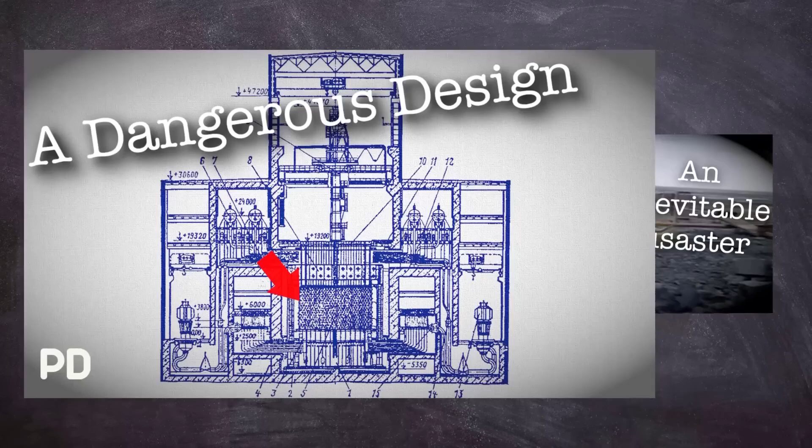Don't worry, I'll still be here when you get back. Ah, you're back. Welcome. Yep, I know it was a bit of an overdone trope, so let's get back to the main reason why you're here.

Our story starts back in 1970 in Ukraine, about 100 kilometres, 62 miles, from Kiev, when ground was broken for a new city that would become known as Pripyat, an atomgrad designed to house the workers for a new nuclear plant. It should be said that the original plans were to build the city and the plant just 25 kilometres or 16 miles from Kiev, but it was thought to be too close to a major city, which turned out to be a good decision.

The concept of an atomgrad is similar to, say, Tomsk, which were closed cities, although Pripyat was open later on in its short lifetime as a city. These municipalities were designed to be self-contained communities that had a sole purpose: keeping the power plant working and, by extension, the workers that were employed there happy. The community at Pripyat was developed to be the perfect home for a young family, with its amusement park and modern, at the time, architecture.

In the same year, the ground where the new plant would exist was prepared for construction. The Chernobyl Nuclear Power Plant began construction proper in 1972 after the central government decided on what type of reactors the site would house. Originally, the idea for a pressurised water reactor was thought to suit the new plant, but it was overruled by Anatoly Alexandrov, the chief scientist who was at the time supervisor of the RBMK reactor plant project. The reactor type was preferred due to the design being cheaper to produce, and as we found out with Leningrad, that cost was a pretty high priority, some might say even over safety.

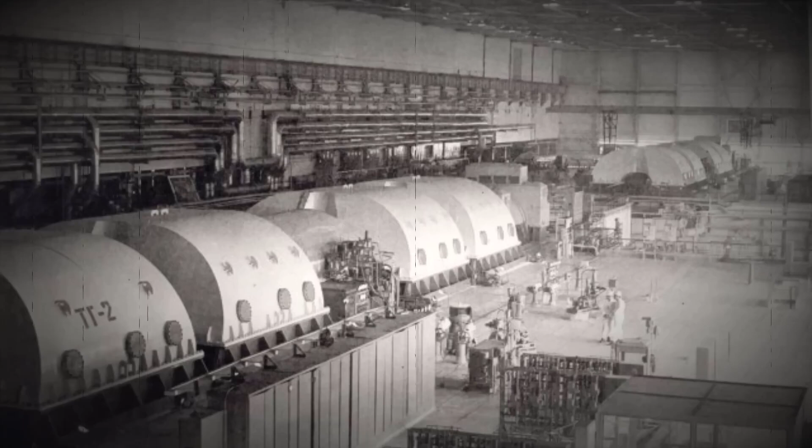The nuclear power plant had the first of its 4 reactors ready to operate in 1977, followed by number 2 in 1978. As a quick side note, Units 1 and 2 were the first generation RBMK-1000 reactors, and because of this they had slightly different core loadings and containment structures. The remaining 2 reactors at Chernobyl were of a slightly more modern second generation, named Units 3 and 4, which went online in 1981 and 1983 respectively.

There were plans for another 2 units, but these were abandoned after 1988 when risks of contamination left the project untenable. The nameplate capacity of Chernobyl Nuclear Power Plant was Unit 1 at 1000 megawatts of electricity, Unit 2 at 1000 megawatts of electricity, Unit 3 also at 1000 megawatts, and the same with Unit 4.

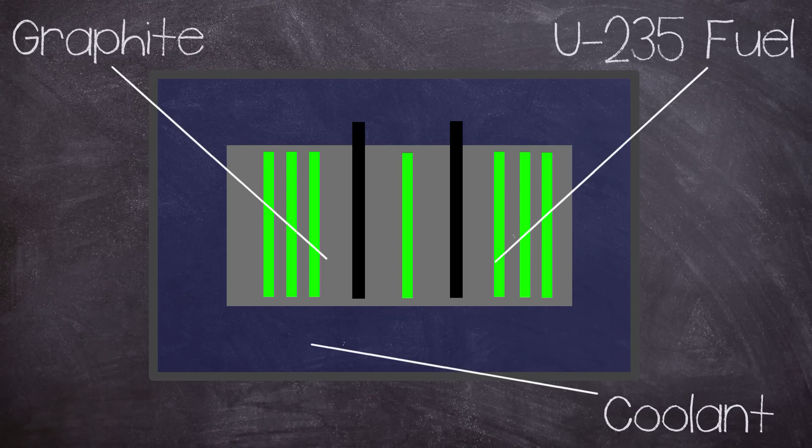In this video, I'll be focusing on the second generation RBMK, its design, and more specifically Unit 4. But I did look into the first generation in the Leningrad video. The RBMK was a bit of a unique design in the reactor world, but it was a product of evolution rather than revolution, in that it used graphite to moderate the chain reaction with light water as a coolant. This combination allowed it to use lower enrichment uranium-235 for fuel, which is, not surprisingly, significantly cheaper than other reactor designs. The RBMK had a very large core region, consisting of a height of 7 metres and a diameter of 11.8 metres.

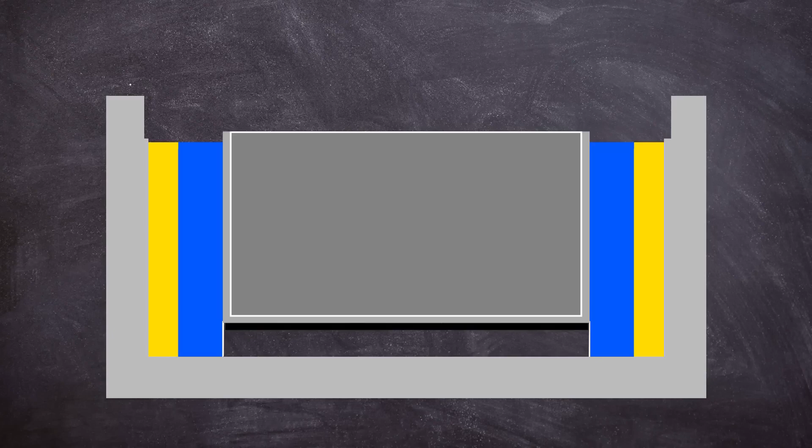This core was mounted in a steel cylinder placed on top of a biological shield. The steel cylinder was 16mm thick and had a diameter of 14.52 metres by a height of 9.75 metres, dug into the floor of the reactor building, inside a reinforced concrete-lined pit. Between the steel wall and the concrete lining, a water tank was placed, followed by sand packing. Below the bottom biological shield, there were several basements used for pipework for the reactor core cooling loops. The core consisted of graphite blocks sized 25 by 25 centimetres, stacked up with holes drilled through the centre for fuel and control channels.

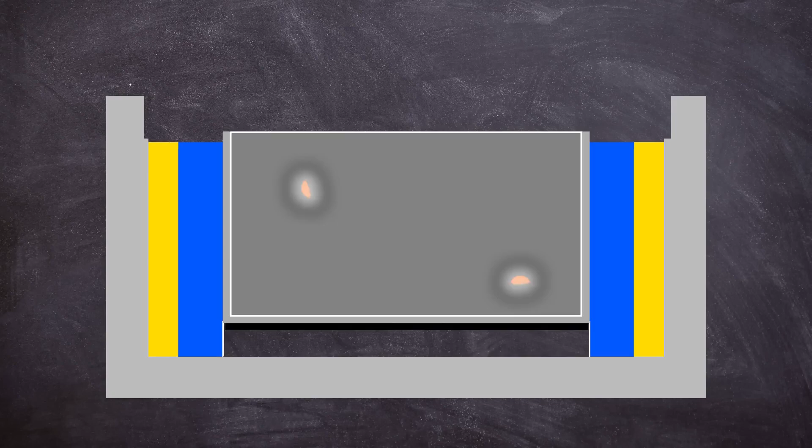The size of the core could cause issues in reactivity control during operation, but we will talk about that a bit later on. On top of the core, another biological shield was placed with a steel cover on top of it, which formed the floor of the reactor hall.

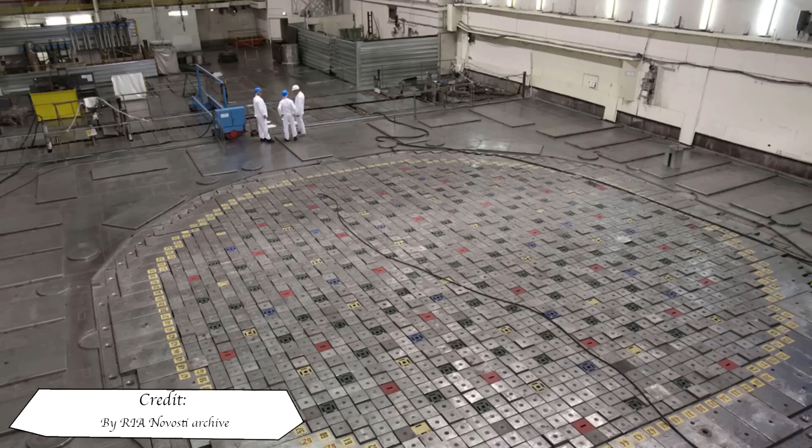The cover plate was capable of withstanding a pressure build-up resulting from steam released by two simultaneous channel ruptures. All of this allowed the design to be refueled whilst in operation, which again helped with costs by reducing downtime.

As a side effect of this, the confinement structure of RBMK reactors is less than ideal, as the tall refueling machine had to be housed inside the reactor hall. Because of the large floor space and subsequent roof requirements, the vast quantities of heavy concrete wouldn't have been architecturally, or more importantly, financially viable.

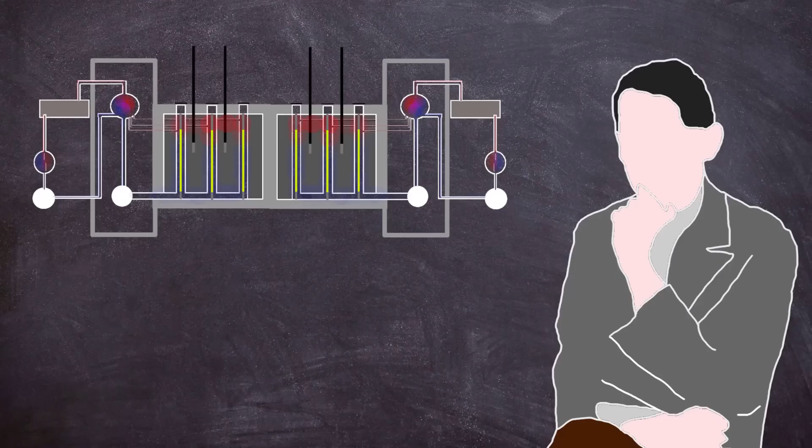The RBMK didn't have a prototype and was instead put straight into production, with the first reactor being installed in Leningrad in 1970. The original designs omitted confinement, instead claiming that the fuel being in its own channel with flowing cooling water was an acceptable alternative.

The main takeaway from this is confinement was poor, resulting in disastrous results in the case of a fission product release. The coolant was pumped through the core, from the bottom common header through high pressure tubes that jacketed the fuel elements, where the water would boil.

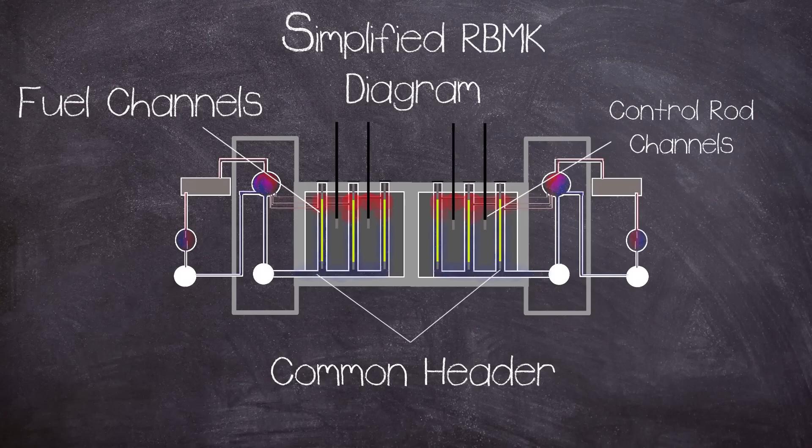Coolant water also circulated in the control rod channels. The primary cooling of the reactor was via two separate cooling circuits, one each for half of the core, meaning everything was doubled up, leading to four main circulating pumps, which were three operating, and one standby per loop.

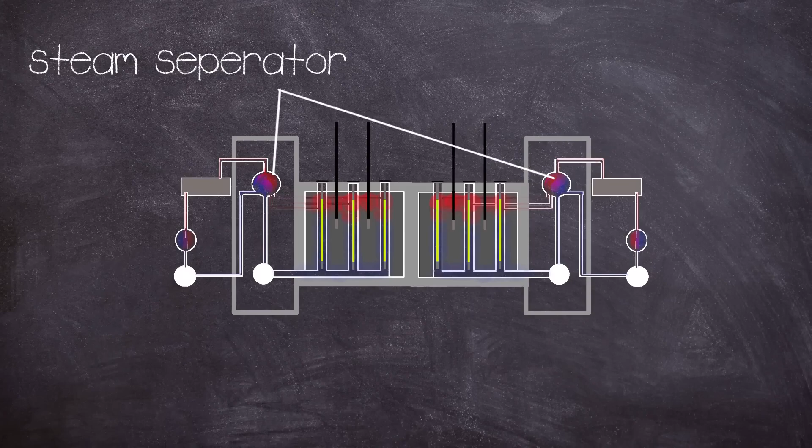As the coolant boils, it exits the top of the core and is passed through a water steam separator, which takes the steam to high and then low pressure turbines which generate the electricity. The steam is then passed through a condenser that turns it back into water to be pumped back into the core, completing the primary cooling circuit.

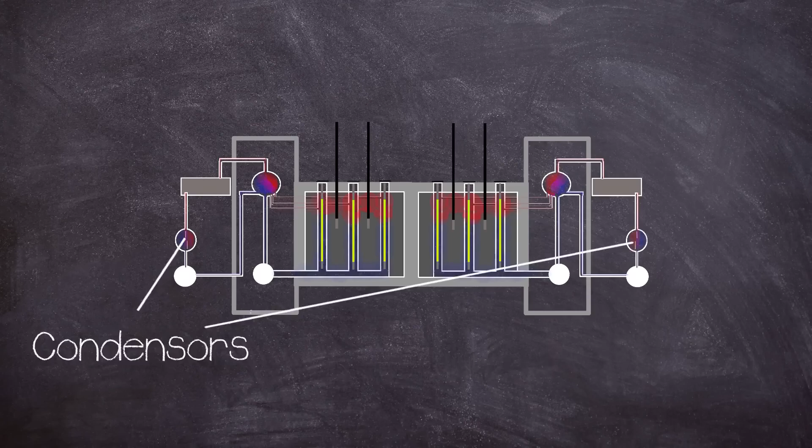The condenser is cooled by using a separate secondary water cooling circuit, meaning the primary cooling circuit is self-contained.

As mentioned before, the reactor employed graphite blocks for its moderator. A moderator is used to reduce the speed of fast neutrons released from fission, so they can better facilitate a chain reaction, getting more use out of the fuel. Ideally, moderators work without capturing any neutrons, leaving them as thermal neutrons.

But where the design has its potential flaw is having a separate coolant that can also absorb neutrons, which can make the reactor unstable in certain situations. This brings up the big elephant in the room, and that is void coefficient.

It wasn't just the graphite that had moderation characteristics, but the coolant water as well, because H2O naturally slows down and absorbs neutrons. This brings a problem for the reactor, as with the increase in temperature from fission, the coolant boils off into steam.

This is known as voids, i.e. a bubble that does not absorb neutrons. With the steam not absorbing neutrons, this leads to an increase in the power of the reactor.

The RBMK did not rely solely on its coolant for moderation, because that's what the graphite was for, but the water did absorb neutrons, meaning that as it boiled off, the operators had to compensate for this with the control system. If not properly managed, an incident of a runaway can happen as the coolant heats up, increasing reactivity, heating up the coolant more.

Creating more steam, leading to greater reactivity, and this is called a feedback loop. During this reactor state, more and more neutrons are produced and their density grows exponentially fast, creating a positive void coefficient. The risks of a feedback loop were greater at certain power levels, but this will be covered later on.

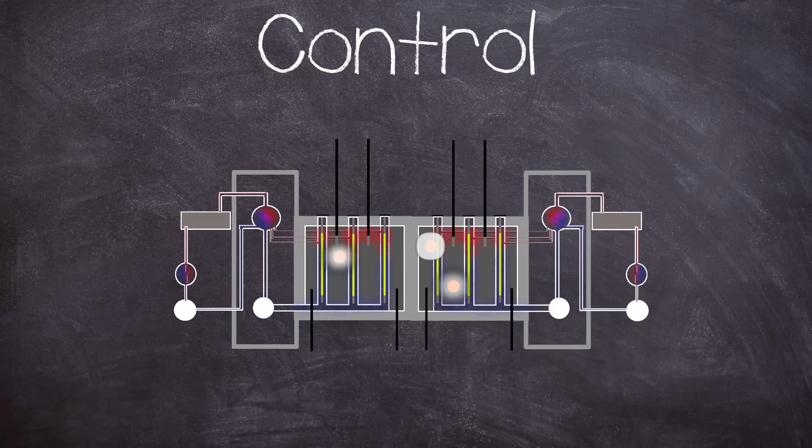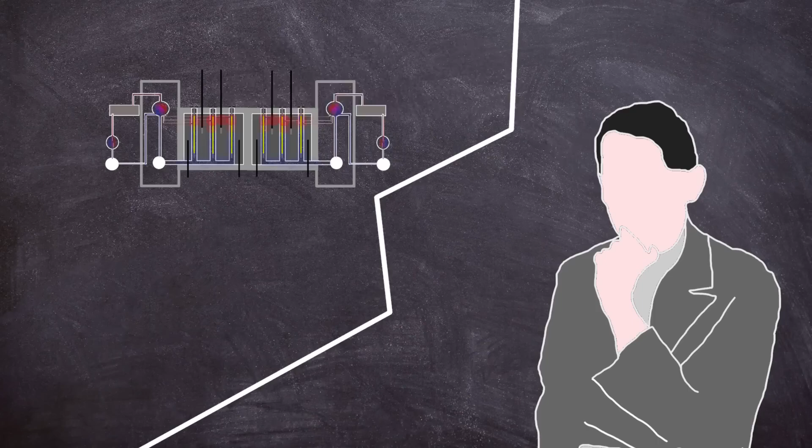And this leads on to the strange design choice for both top-loaded and bottom-loaded control rods. There were 167 top-loaded rods and 32 shortened rods loaded via the bottom, and another 12 automatic control rods inserted from the top. The shortened rods were used to manage axial power distribution, which was necessary due to the core size to manage hotspots.

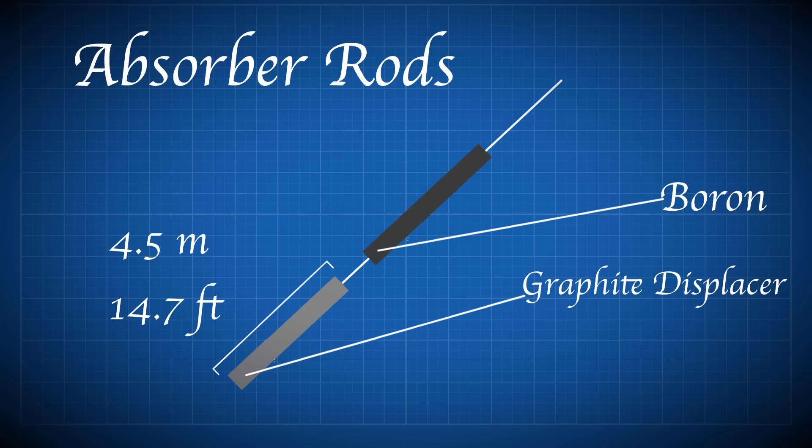The main control rods had a 4.5 metre long graphite rod, termed a displacer, attached to the end of the length of the control rods, except for the 12 rods that were used in automatic control.

The displacer connected to its rod via a telescope, with a water-filled space of 1.25 metres separating the displacer and absorbing rod. This was to stop water filling the space left behind by the control rod after it had left the core region, which would parasitically absorb neutrons.

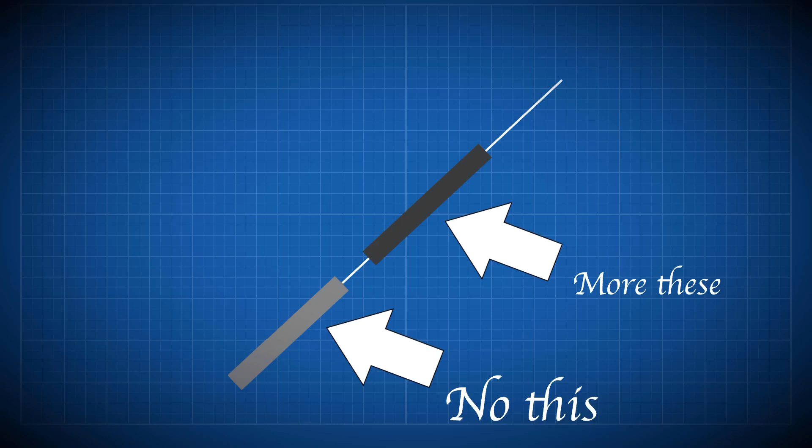Because removing one neutron absorber in the form of a boron control rod to be replaced by another neutron absorber, albeit weaker, in the form of H2O, kind of defeats the point of a control rod. Thus, if there was no displacer, more control rods would be needed, as each one would have less of an effect on the reactivity of the core.

The dimensions of the rod and displacer were such that, when the control rod was fully extracted, the displacer sat centrally within the fueled region of the core, with 1.25 metres of water at either end. But this setup in certain situations could cause a positive scram effect.

On receipt of a scram signal causing a fully withdrawn rod to fall, water was displaced from the lower part of the channel as the rod moved downwards. This caused a localised insertion of positive reactivity in the lower part of the core.

This was because the RBMK had a high moderator to fuel ratio, meaning the lower part of the core would experience a spike in reactivity as the graphite displacer entered it, as it replaced the neutron absorbing water with neutron moderating graphite. But this situation was only dangerous at certain power levels of the reactor, which was meant to be mitigated by the knowledge and training of the operators, and also importantly by their management.

Part of this mitigation was by having an operating reactivity margin. The ORM is the number of equivalent control rods of nominal worth remaining in the core.

The total time required for a scram, or insertion of the emergency control rods into the core when starting from the upper limit stop switches, was around 18 seconds, which was relatively slow. But this was due to the size of the control rod channels and the fact that the coolant had to be pushed out of the way.

The scram could be initiated by the control system or manually via the AZ5 button. The control system employed on the RBMK-1000 utilised ionising chambers and various sensors both inside the core and outside, which were effective from power levels above 10% of total power.

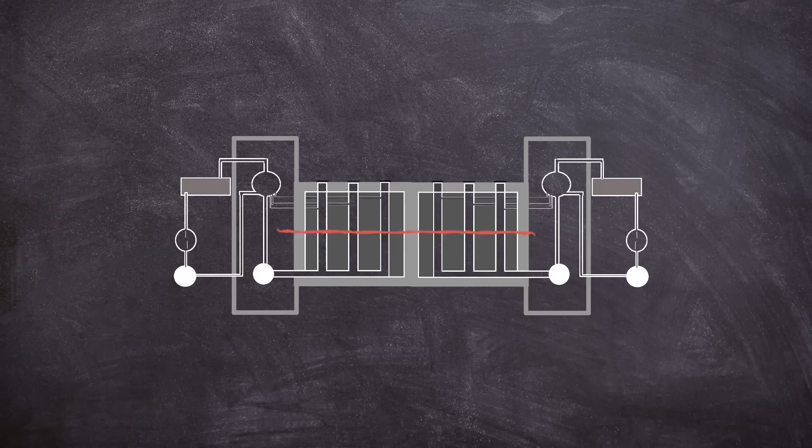The external detectors were all mounted mid-level of the core, meaning no low axial power monitoring could be undertaken. This meant that low power operation below 10% had to be done by the operators relying on experience and feel when monitoring the equipment.

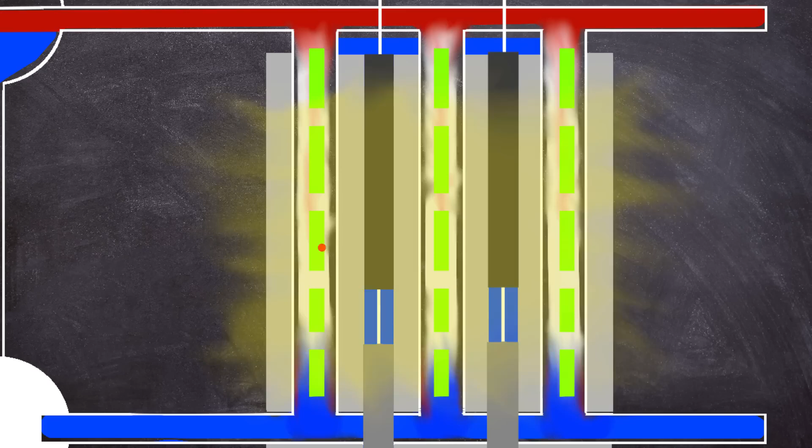But when the power of the reactor is decreased, the xenon-135 is not burned off, and can shut down the chain reaction by absorbing too many neutrons. This is known as an iodine pit.

All is not lost, as xenon-135 has a relatively short half-life of around 9.2 hours, so a reactor core is considered poison-free after several half-lives have passed.

But this is not good from an economic standpoint, as the unit would be shut down for a few days, which is where good management is meant to come into effect, where safety is prioritised over money. But in the former USSR, taking a reactor out of action for a few days could have a detrimental effect on one's career longevity.

Our story starts with an issue inherent to all reactors of any type, a thing called decay heat. You see, reactors produce heat from fission, which is used to create steam to drive the turbines for electrical power.

Some of this power is taken to drive the electronically operated coolant pumps, which keep the coolant flowing through the core. The reactor needs around 28,000 litres per hour during full power operation.

Some heat is produced not directly from fission, but instead from the products produced from the chain reaction, and this is known as decay heat.

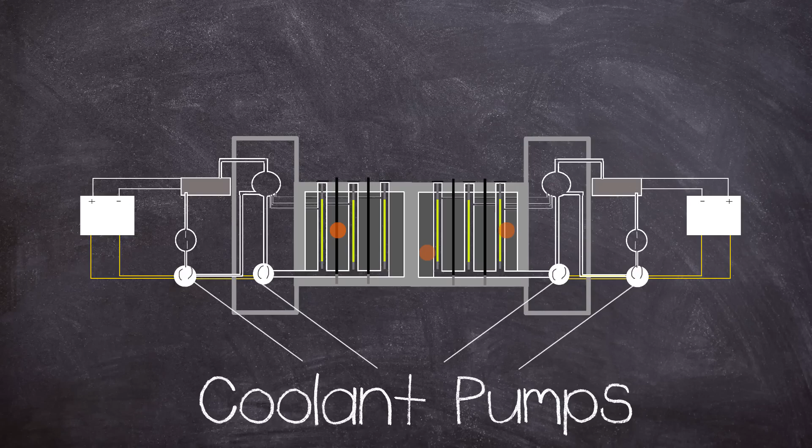And when the reaction stops, this continues, at least for a while after shutdown. During power operation, this is fine as electricity is being produced, but after shutdown, the pumps need to keep circulating to remove the decay heat.

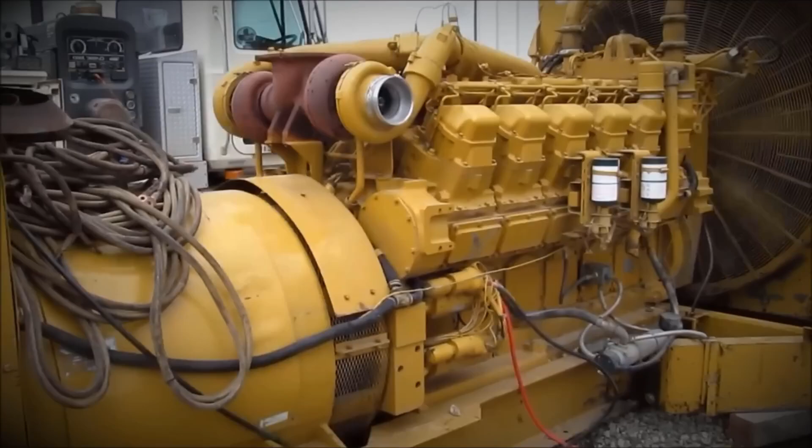Usually the electricity needed for the pumps can be drawn from the national grid. But what about if there is a full power outage? Then backup is needed. This presents a problem. If for any reason, scheduled or not, a reactor is shut down and there is a power cut, how will the pumps keep working? Well, the solution is pretty simple, and that is a diesel backup generator.

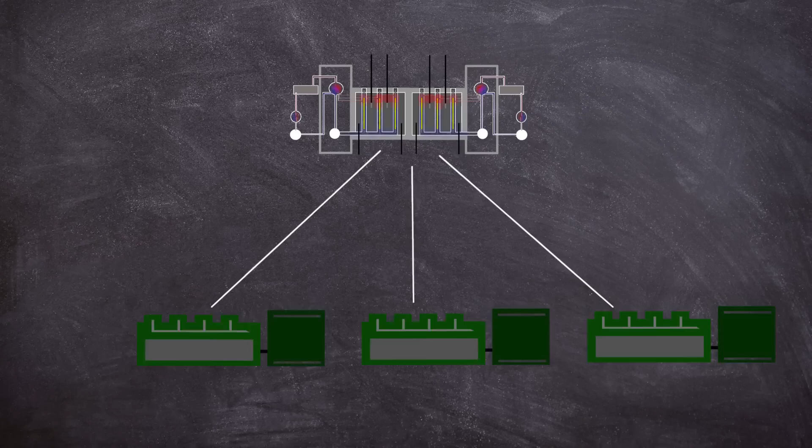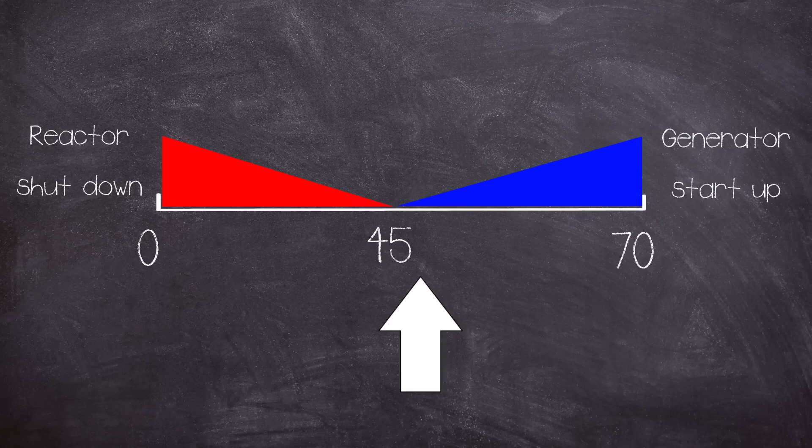Each of Chernobyl's reactors had 3 backup diesel generators, which took in excess of 70 seconds to reach full power. Too much time in the event of a full power cut. In theory, some of this time could be covered by the spool down of the turbo generators, which was theorised to cover around 45 seconds. Not the full time needed, but possibly enough to prevent fuel melting.

To prove that this could work, it had to be tested out, and in 1982, 1984 and 1985 this was attempted, but all tests failed to produce the electricity needed to run the pumps. The test was to be conducted again in April 1986.

Strangely, the test procedure that was written hadn't taken into account the eccentricities of the RBMK reactor, especially at low power outputs. The test was to be conducted during a routine shutdown. For the test to go ahead, some vital systems had to be switched off, most notably the active-passive emergency cooling system used in a loss of coolant accident. This required the chief engineer to sign it off.

In preparation for the test, the following had to be set up. The reactor power was to be reduced to between 700 and 1000 megawatts of thermal energy, and the steam turbine generator was to be at normal operating speed.

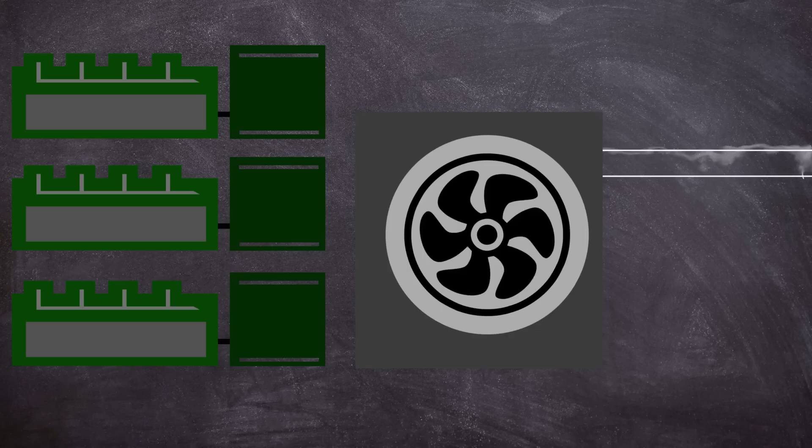After all this was sorted, the preparations for the electrical test could go ahead. The steam supply to the turbine generator would be closed off. The turbine generator performance would then be monitored to see if it could bridge the power for coolant pumps until the emergency diesel generators took over. When the emergency generators supply electrical power, the turbine generator will be allowed to continue freewheeling down. The normal planned shutdown procedure of the reactor was then to be completed.

The date of the test was to be the 25th of April 1986, 15 minutes past 2 p.m, completed by the day shift. As such, the operators were briefed on the procedure and a team of electrical engineers was present. At around 1 a.m. on the 25th of April, the reactor was gradually powered down to around 50%, in time for the day shift.

At 1:05 p.m, the turbo generator TG7 was switched off. The 4 main circulating pumps, 2 electrical feed water pumps and other electrical equipment that was connected with this turbo generator were switched over to bus bars for the turbo generator TG8.

The ECCS was disabled with the correct authorization from the chief engineer, but just after 2 p.m, the Kiev electrical controller asked for the test to be postponed to cover the evening electrical peak demand. The request was due to another power station in the region unexpectedly going offline. Chernobyl's director agreed and the test was pushed back, but the ECCS was not reinstated.

The status of the ECCS showed the lack of safety culture at the plant. Although the system wouldn't really be a factor in a disaster, it highlights the management culture at the time.

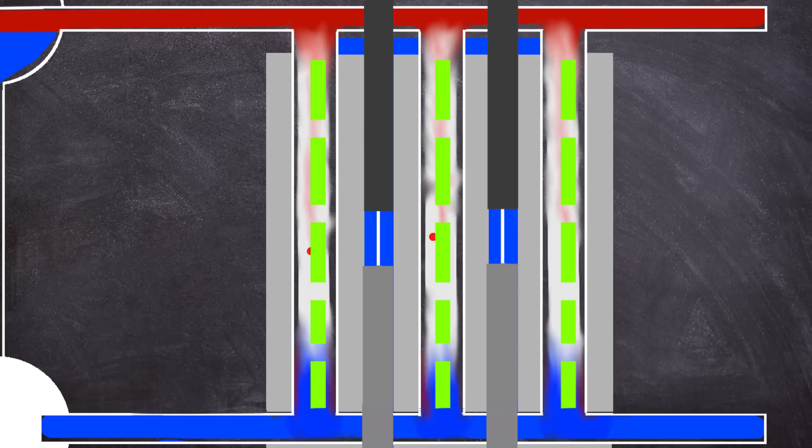As the power dropped off, the high amounts of iodine-135 decayed into the poison xenon-135, as it was not being burned off quick enough. This reduced the power of the reactor without any operator intervention to 500 megawatts of thermal energy, at which point manual intervention was started in order to maintain the level.

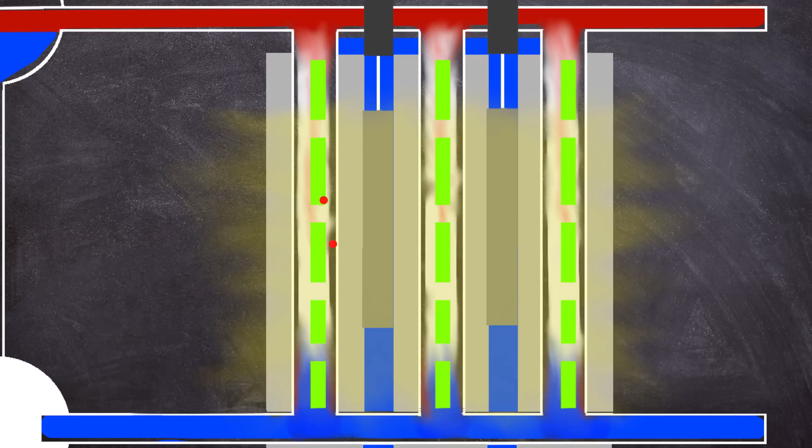At 28 minutes past 12 on the 26th of April, the reactor power had dropped to just 30 megawatts of thermal energy, with a near shutdown-like state. It is not 100% known why, but both equipment failure and operator error have been attributed to the reactor state.

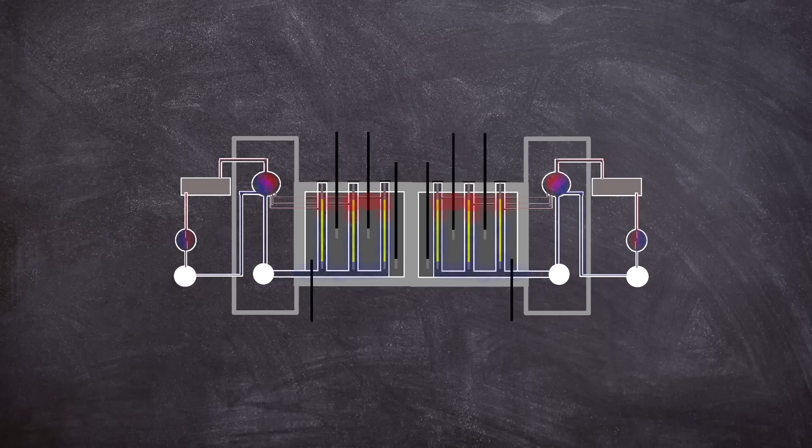As set out in the operating instructions, the reactor should have been powered down to wait for the xenon-135 to decay, but shutting down the reactor without doing the test wouldn't have made many friends in management. To increase the power, the control rods began to be removed to try and overcome the poisoning of the core, reduced coolant void and graphite cooldown.

In the attempts to raise the power, the operational reactivity margin was violated by removing more of the absorbing control rods, and by 1 AM around 200 megawatts of thermal energy was reached. The reactor was now in a dangerous state. Not wanting to leave empty-handed, Dyatlov insisted that the test be conducted at the current power level.

In reality, the core was heavily poisoned and was in a dangerous state with very few absorbing rods for emergency control. During the preparations of the test, the operators powered up the 2 backup coolant pumps, leading to all 8 working. The increase in water flow reduced the voids within the core, which would have set off an automatic scram, but this was bypassed by the operators.

As the coolant absorbed the neutrons in the core, only 8 control rods were left as a safety margin. The minimum that the ORM stipulated was that around 28 rods should have been in the core. The reactor started to experience a feedback loop. With not many rods in the core to manage the power, the water in the reactor found itself being the main neutron absorber, and disaster was just waiting to happen.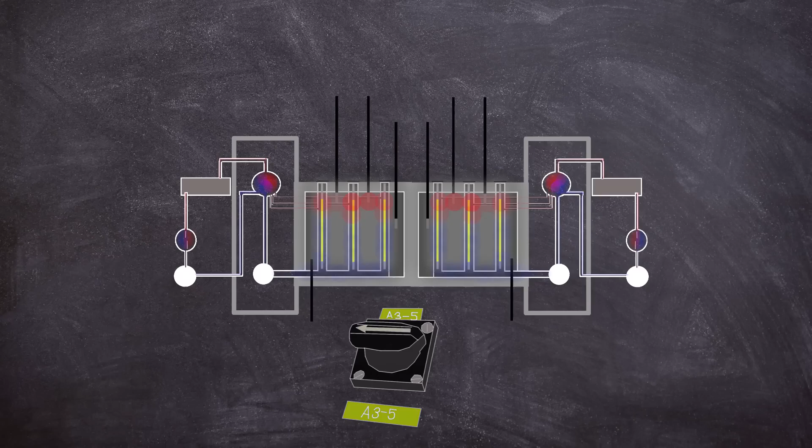At 1:23 in the morning, the actual test had now begun. The command given to stop the valves for turbine number 8 closed and the rundown operation started. As the turbines spooled down, the power to the feed water pumps slowed, increasing the temperature of the coolant, creating more voids. With less water absorbing neutrons, the power of the reactor began to rise.

A feedback loop was beginning to start in the lower part of the reactor core. The operators pressed the AZ5 button in response to the worrying increase in power, and the control rods started their travel into the reactor core.

As the control rod attached graphite displacers moved down to the lower part of the core in their control channels, the neutron absorbing water was pushed out of the way, creating a momentary spike in power, replacing it with neutron moderating graphite. During the spike, some of the fuel rods ruptured, blocking the control rod columns, stopping the control rods at 1/3 insertion. This left the graphite water displacers stuck in the lower part of the core, increasing the runaway power excursion. Within 3 seconds, the reactor power rose to 530 megawatts of thermal energy.

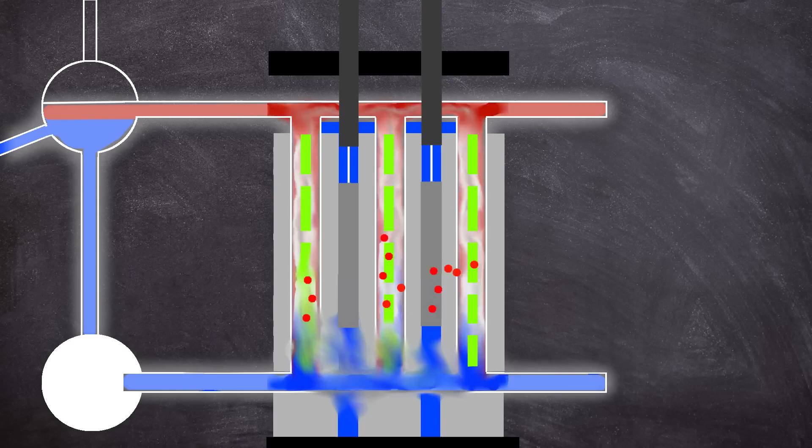In the control room, a few shocks were felt, and the control rod indicators showed that the insertion had stopped. As the channel pipes began to rupture, mass steam generation occurred as a result of depressurization of the reactor cooling circuit. Fission materials leaked into the coolant, and steam pressure grew inside the core as the coolant boiled off, creating a greater neutron population. The reactor power hit 30,000 megawatts of thermal energy, although it is thought that the power could have gone much higher than that during the excursion.

The steam blew off the top steel cover and top biological shield of the reactor as more than the 2 designed fuel channels failed, releasing debris into the reactor building. This was what would later be described as the first explosion, but it would not be the last.

A second, more powerful explosion occurred between 2 and 3 seconds later, and this destroyed the roof and ejected superheated pieces of graphite out of the reactor hull, peppering the area around the building with shrapnel. Some red-hot material fell onto the roof of the machine hall and started a fire. It is thought that around 25% of the core material was ejected.

The now uncovered reactor core mixed with the outside air and ignited a graphite fire. A blue glow could be seen outside the reactor building from ionizing radiation emitting from Unit 4. There was nothing left of the reactor confinement structure, which meant little stopped the harmful contamination from escaping.

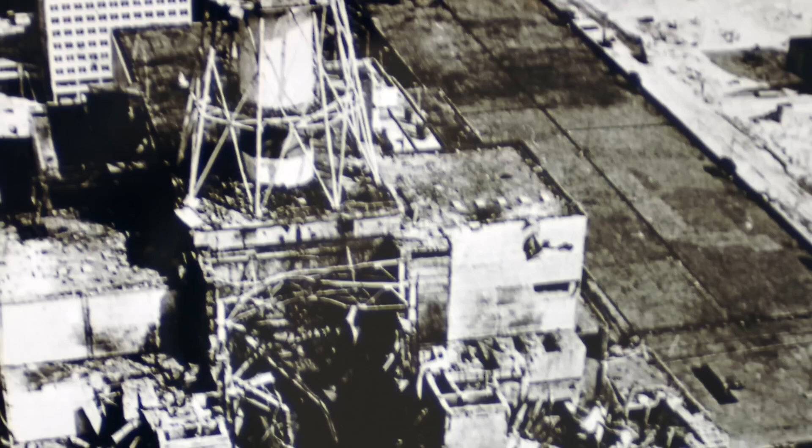Some of the debris that was ejected started a fire on the roof of Reactor 3's building, but insanely the unit wasn't shut down straight away. Instead, the operators were told to take iodine tablets and don respirators.

At 1:45 in the morning, the first responders from the Chernobyl fire team arrived under the command of Lieutenant Vladimir Pravik and began trying to extinguish the flames on Unit 3's roof. All around them lay pieces of Unit 4's graphite core. The firefighters were only aware of the fire, and because of this they didn't have any radiological protective clothing on. As they worked, they breathed in some of the fission material in the form of dust and were exposed to the deadly radiation.

Many would come down with acute radiation sickness shortly after. Some of the first responders felt a metallic taste in their mouths, similar to what others had reported post-exposure, for example from the victim of the Wood River Junction criticality.

The fires on the roofs of Units 3 and 4 were under control between 2:10 and 2:20 in the morning, and the fire was fully put out at 5 o'clock in the morning. However, the graphite fire in what was once Unit 4 continued to burn, expelling its radioactive plume of dust, steam and smoke into the atmosphere.

The operators started to pump water into the core, but this did little to bring the situation under control.

The estimated dose of 5 to 6 Röntgens per second was experienced around some parts of the reactor building, which is equivalent to more than 20,000 Röntgens per hour, enough to give you a lethal dose in minutes. Effective dosimeter monitoring of the operators was unavailable when the two 1000 Röntgen per second capable meters were inoperable. The only remaining meters maxed out at 0.001 Röntgens per second, which immediately read off the scale when used, meaning that no one in the control room actually knew what they had received.

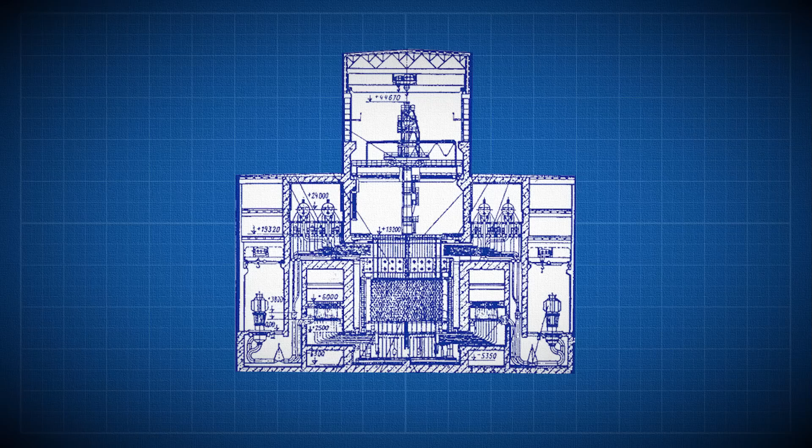A government commission was created. The firefighting efforts and pumping of coolant water left the basement flooded, which caused another potential disastrous outcome: another steam explosion. The fuel from the core was melting towards the flooded basement.

But below that was more water from the bubbler pools, a large water reservoir for the emergency cooling pumps and a pressure suppression system. Needless to say, this was the next point of focus for the accident management team.

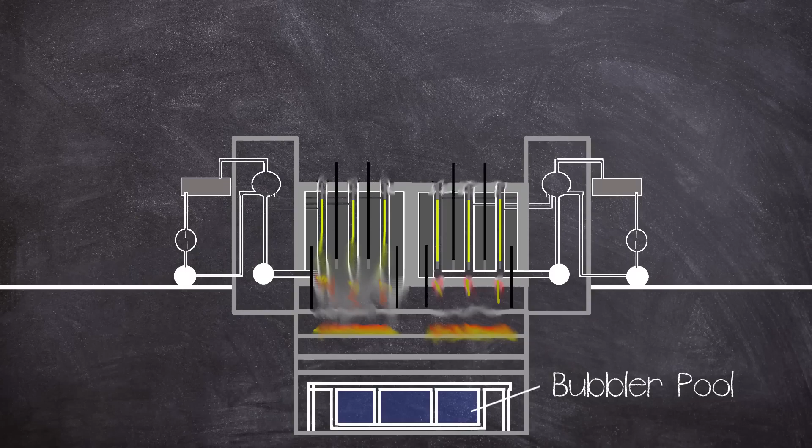Engineers Alexei Ananenko and Valery Bezpalov and supervisor Boris Baranov volunteered to empty the bubbler pools. This was done by valves controlling sluice gates, housed in a room that had now become flooded. All three men donned protective suits and breathing equipment and made their way down the corridor.

The men were successful and the bubbler pools began to empty. Surprisingly, all three survived not only that day but continued to live long after the disaster, averting the immediate steam explosion. But that wasn't the end of the worry of a deadly explosion.

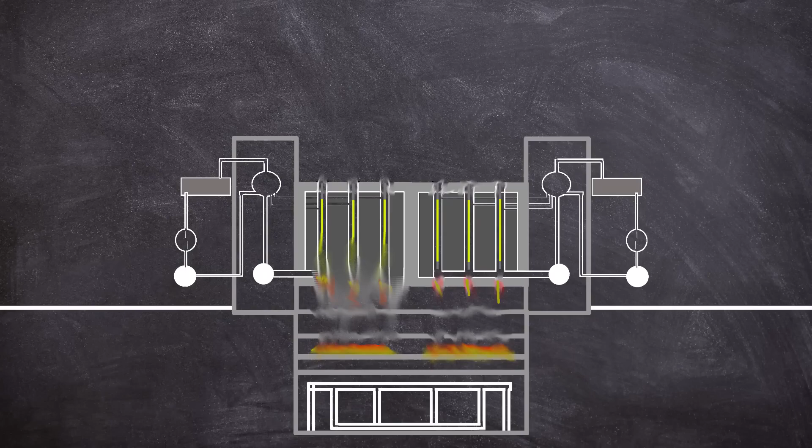As described in the film China Syndrome, the core could continue to melt through the floor of the containment and into the earth, eventually hitting the water table, meaning another steam explosion.

The next focus of the accident management team was stopping the molten core from escaping the bottom of the reactor basement. A design thought up by physicist Leonid Bolshov involved digging out a cavity below the reactor building basement.

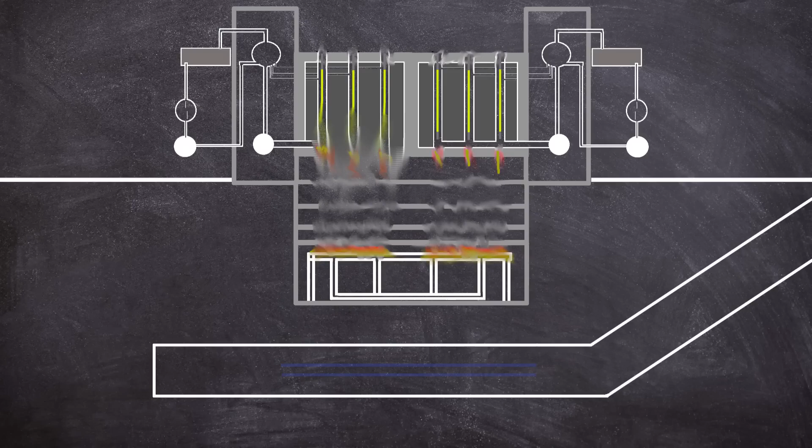The concept used a coiled formation of pipes cooled with water and covered on top with a thermally conductive graphite layer. The graphite cooling plate was to be encapsulated between two sacrificial concrete layers, each one metre thick.

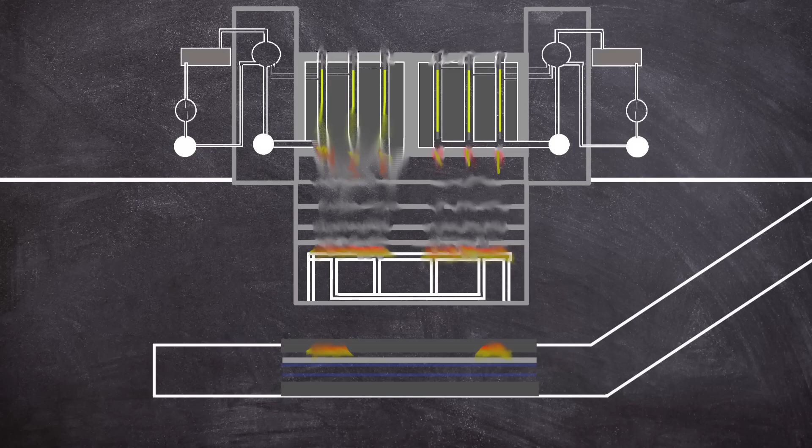In theory, as the molten uranium oxide hit the graphite, it was to rapidly cool down, catching the core meltdown. Thankfully, the theory didn't have to be put into practice, as the core had finally come to rest in one of the lower basements of the reactor building.

Part of which formed the famous Elephant's Foot, which was discovered in December 1986 and had a reactivity of 8,000 roentgens, or 80 grays per hour.

For reference, a whole body dose of around 5 grays can be lethal. The molten material is known as corium, a mixture of the material found inside the core, mainly made up of silicon dioxide with traces of uranium, graphite, zirconium and titanium.

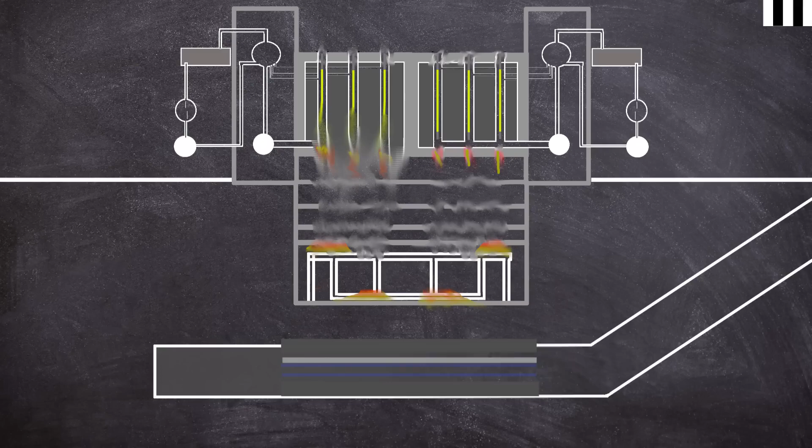The excavated cavity and cooling system, now unneeded, was filled with concrete to help the structural integrity of the heavily damaged reactor building.

A plan was conceived to contain the contamination release of Unit 4 in the form of a concrete lid, which would come to be known as the sarcophagus.

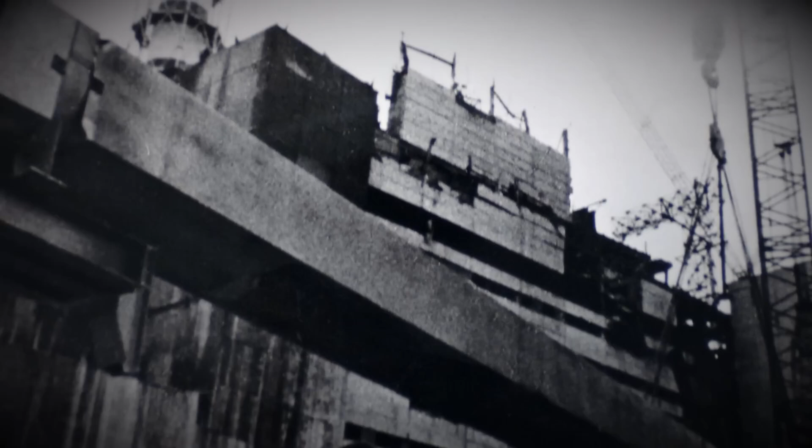Construction began in May 1986, 24 days after the disaster, to encapsulate some 200 tonnes of radioactive corium, 30 tonnes of highly contaminated dust, and 16 tonnes of uranium and plutonium. The construction would last 206 days, between June and late November of the same year.

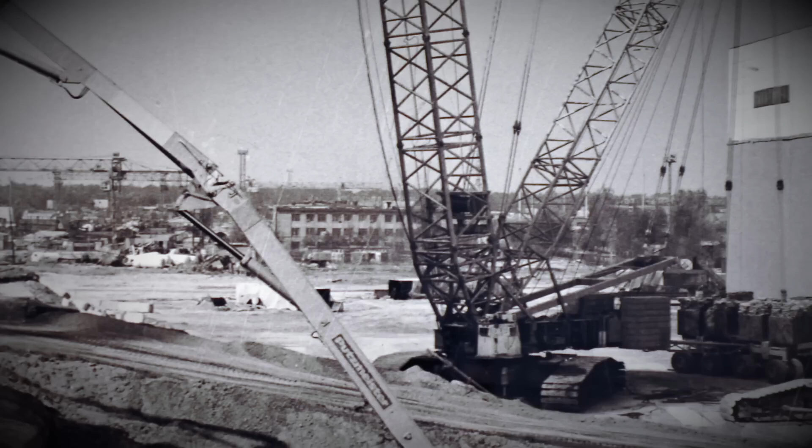But before the core could be enclosed under the sarcophagus, the next phase of remediation was to remove all the core material scattered across the area, and one of the most dangerous places was the roofs of the buildings surrounding Unit 4. Initially, robots were thought able to undertake the clearing works, but due to radiation interference, only around 10% of the debris could be recovered.

This necessitated the use of good old-fashioned people. The most basic equipment was needed for the task, including protective clothing and a shovel. A total of 5,000 people, known as liquidators, were called upon to undertake the cleanup on the roof, each only allowed between 45 to 90 seconds of total working time to reduce the risk of exposure.

The calculated risk was 25 rem, or 250 millisieverts, of radiation per person. There were many more liquidators also used for other clearing up works in the wider area.

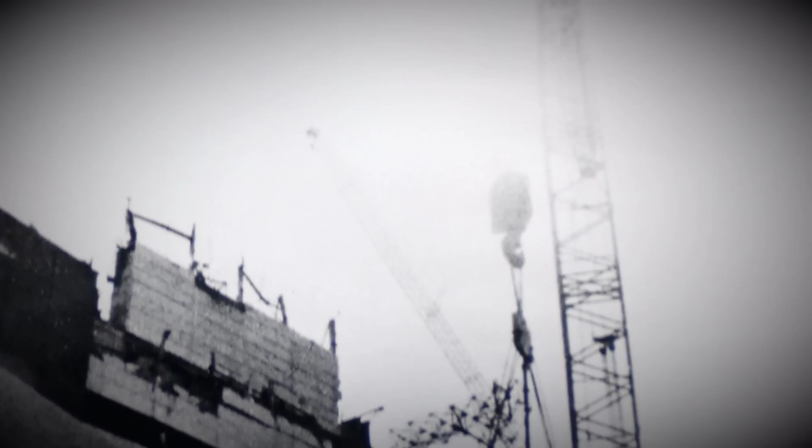And finally, after this, the sarcophagus could be closed over the turbine hall and reactor building. The construction was undertaken over 8 stages, all whilst Unit 4 released contamination, next to Unit 3, which still needed to be operable. Concrete containment walls were built around Unit 4 and a dividing wall was erected between it and Unit 3. The sarcophagus was placed on top of the concrete containment walls.

More than 400,000 cubic metres of concrete and 7,300 tonnes of metal were used during the construction of the sarcophagus. The building encapsulated an estimated 740,000 cubic metres of heavily contaminated debris together with contaminated soil.

Holes were installed in the structure to allow pressure release, albeit through a filtration system. The shelf life of the structure was only thought to be around 20 to 30 years, necessitating a new containment structure, but this will probably be covered in the next video in this series.

So, with an official death toll of 31, a nuclear power plant essentially unusable, and many decades ahead of remediation works, how was Unit 4 allowed to be operated in such a dangerous state? Unsurprisingly, it comes down to management.

The warning signs of the potential for fuel damage in an RBMK-1000 reactor reared their heads several times through the reactor type's history. A partial fuel melting in Leningrad over 10 years before, in 1975, had been covered up, and information was not passed on to other RBMK operational staff at different power plants. Again, the fuel melting incident that happened in 1982 at Chernobyl Unit 1, no less, was also covered up, this time by Viktor Brukhanov, meaning lessons again were not passed on.

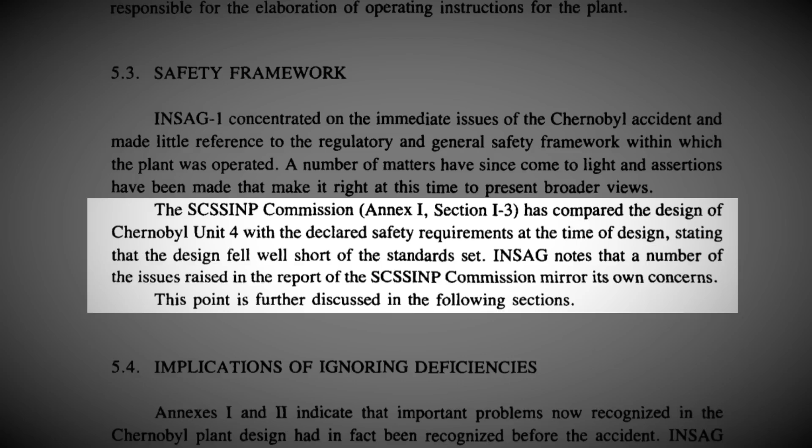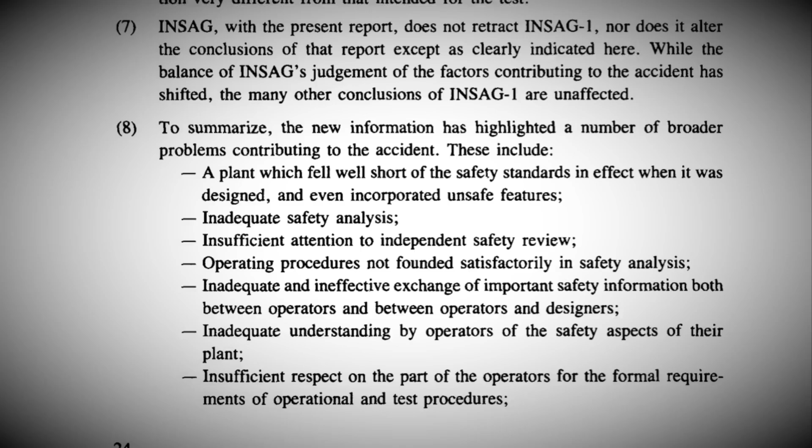This was all highlighted in the 1992 INSAG-7 report, which also said in its summary: the plant fell well short of the safety standards in effect when it was designed, and even incorporated unsafe features, compounded by inadequate and ineffective exchange of information between both operators and between operators and designers. There was an inadequate understanding by operators of the safety aspects of their plant, also affected by insufficient respect on the part of the operators for the formal requirements of operational and test procedures.

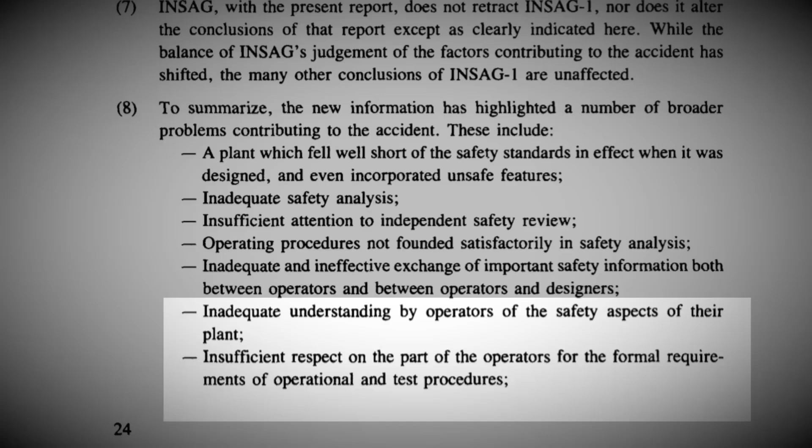The industry in the USSR had an insufficiently effective regulatory regime in place to counter pressures for production. The pressures from central government and lack of awareness of the design risks of the reactor meant that management acted dangerously in the false pretense that the RBMK was indestructible. Pretty much the entire management structure was throwing around a grenade that they didn't know had the pin pulled out of, meaning disaster was only a matter of time.

Now I'll be following up this video with another video at some point about the wider impact of the disaster on local and wider population, as well as digging deeper into the liquidators and their heroic work. Thanks for watching, I hope you enjoyed the video.